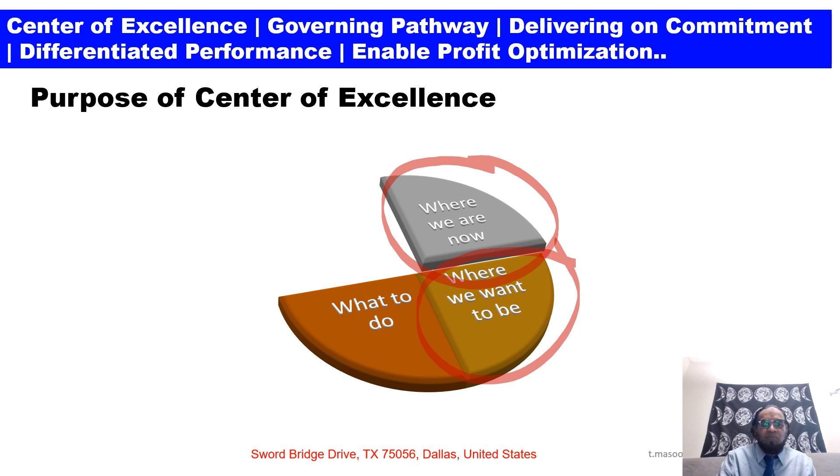Okay, Center of Excellence, lecture number 8, HAZOP study guideline, section number 6. Okay, purpose of Center of Excellence. What do we have to do through the Center of Excellence? First, where we are now. Second, where we want to be. What to do and how to do. These are the 4 segments in order to deliver the results. Okay.

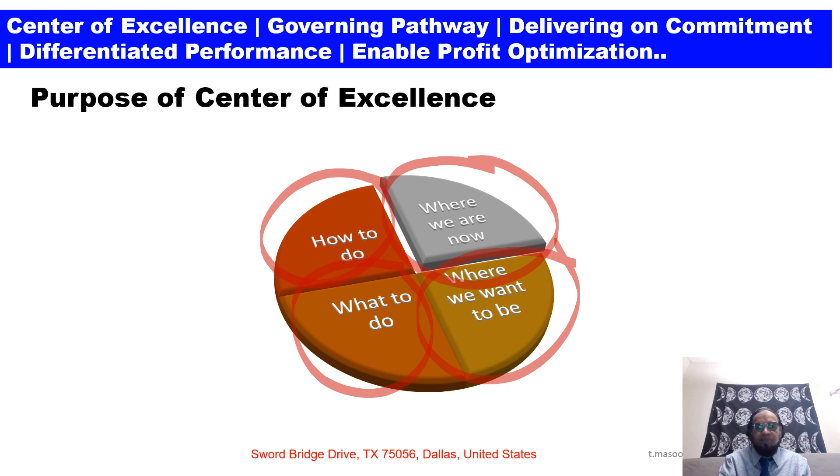Center of Excellence. Governing a pathway, delivering on commitment, differentiated performance, enabling profit optimization process. We have started the hazard and operability management system, that is HAZOP, section number 1. Next lecture, we are going to start hazard identification, then later on quantitative risk management system, risk assessment, and safety integrity level assessment, also known as SIL. So these segments will be discussed at a later stage.

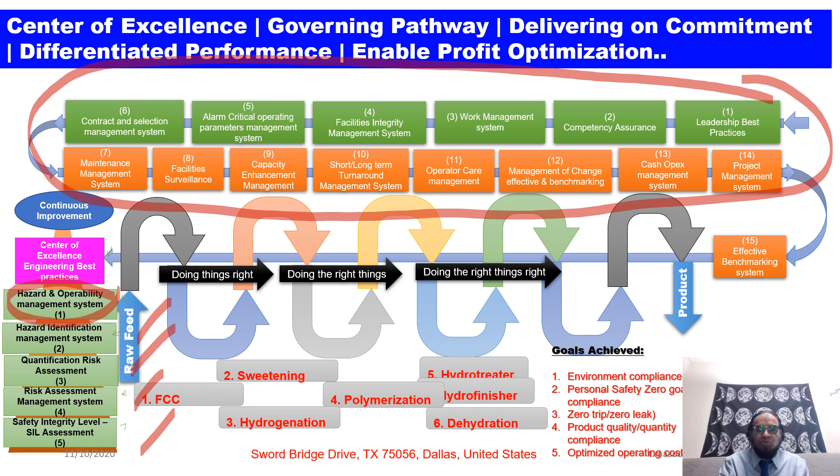Okay, all these segments I have already discussed in my earlier lectures, defined but not in detail. So each segment has a couple of lectures which we are going to deliver over the next couple of years. Probably it could be 200 or 300 lectures. Okay.

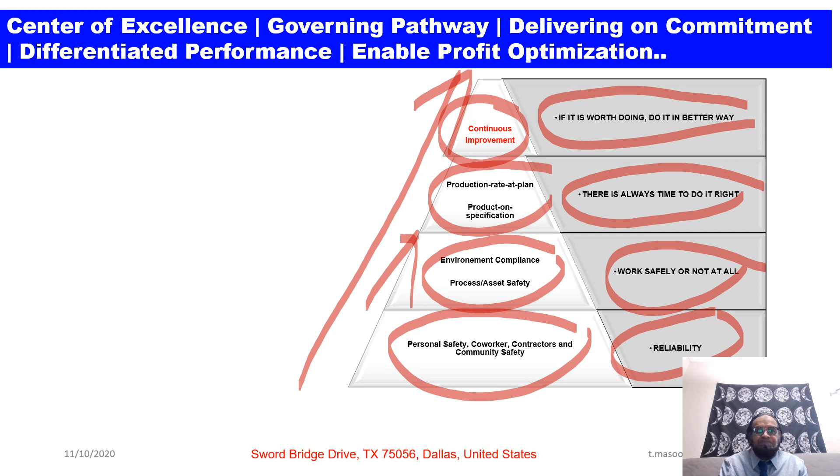That's important. And number 3, production at plan, product on specification. So there is always time to do the right things at the right time. And then continuous improvement, that is my lagging factor. So if it is worth doing, do it a better way. Okay. So what we have to do, everybody should participate.

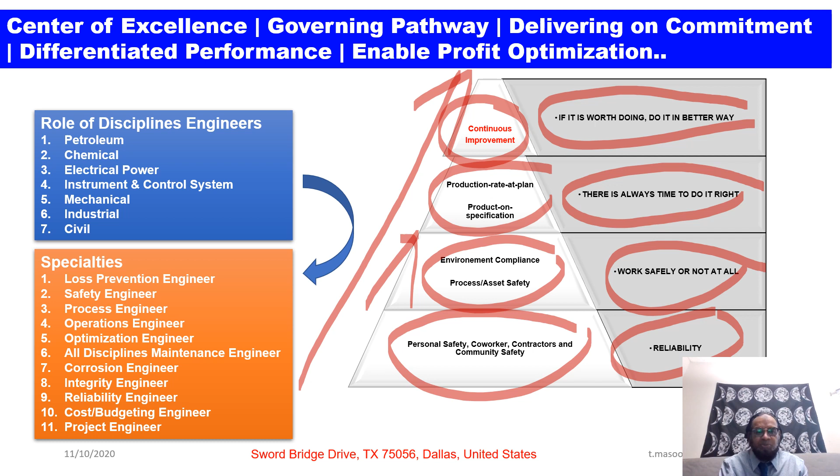The role of different discipline engineers: petroleum, chemical, electrical, instrument, control, mechanical, industrial, civil engineers. These are their specialties. Loss prevention, safety engineers, process, operation engineers, optimization, all discipline engineers, corrosion, integrity, reliability, cost, and project engineers. Okay. These are engineers based on their specialty. They have to deliver first to stop, to mitigate, or to control our leading factors.

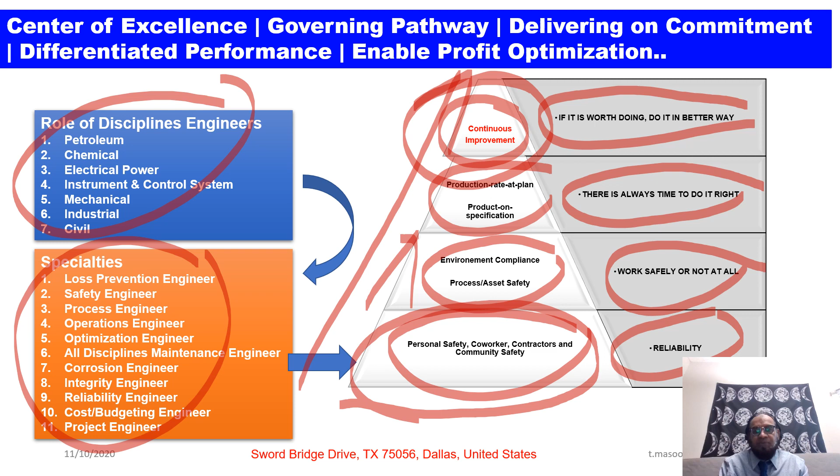So with these leading factors, if there is any leakage from the leading level, it will go to the second level, third, and then you cannot deliver the result over here. Okay. So in order to be specific and to achieve what we want to be, we need a center of excellence for engineering best practices to stay at the top of the pyramid.

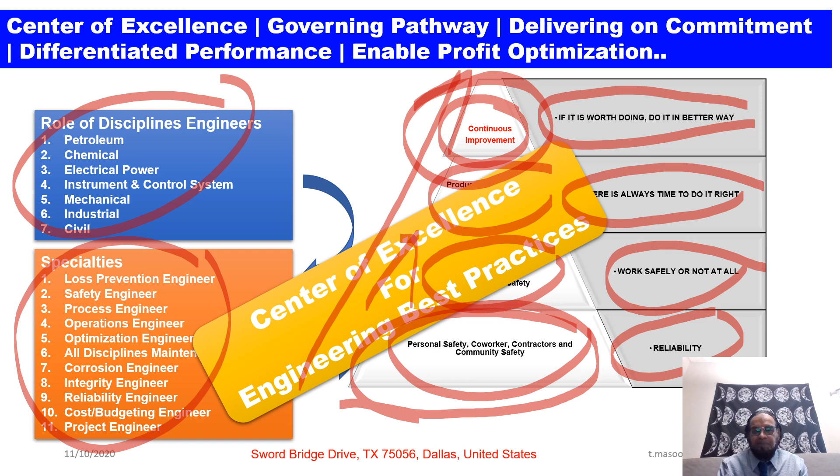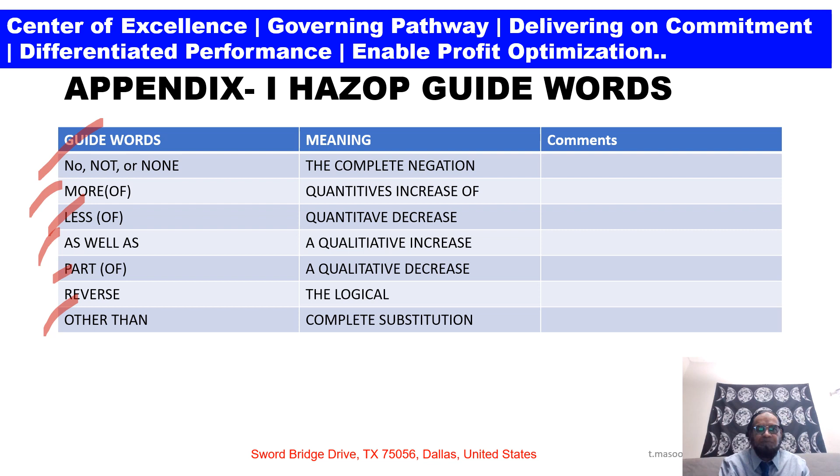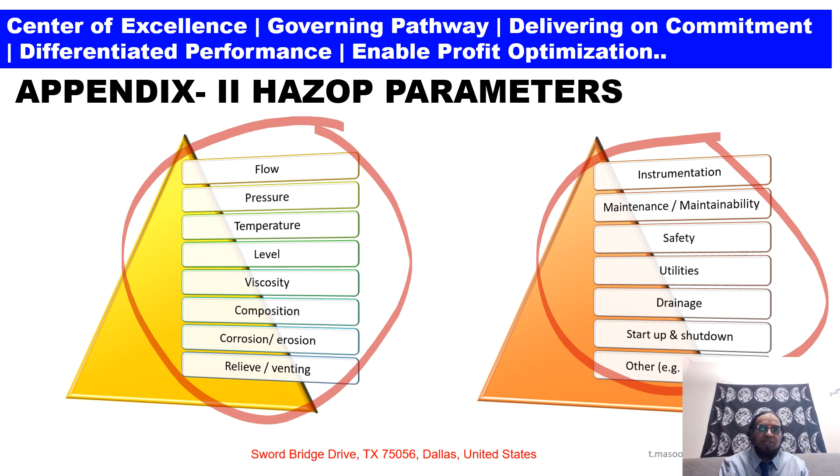Next, appendix 2, HAZOP parameters. HAZOP parameters are constituted in two forms, this is my left hand side and this is my right hand side. Flow, pressure, temperature, level, viscosity, composition, corrosion, erosion, relief, vent, instrumentation, maintenance, maintainability, safety, utility, drainage, startup, shutdown, etc. These parameters must be controlled or mitigated through our mechanisms. That is a key purpose of HAZOP study.

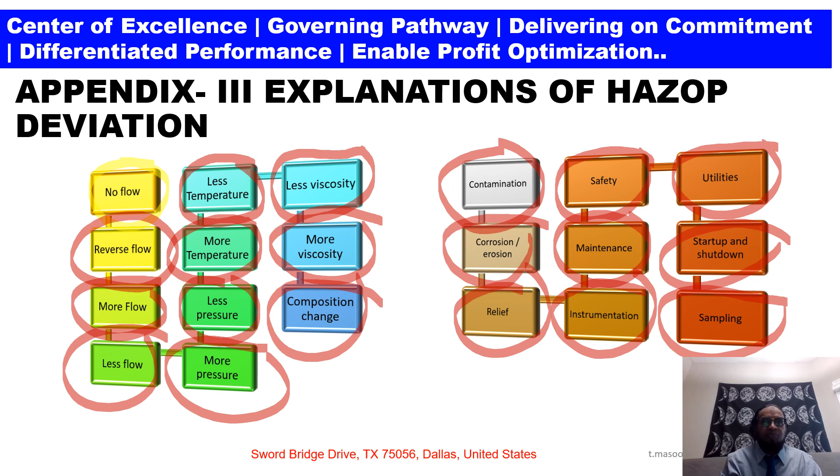The last, but not least, is the sampling procedure and operator safety, time for the analysis result, calibration of automatic samplers, reliability, accuracy of the representative samples, diagnosis of the results, loss of sample flow, etc.

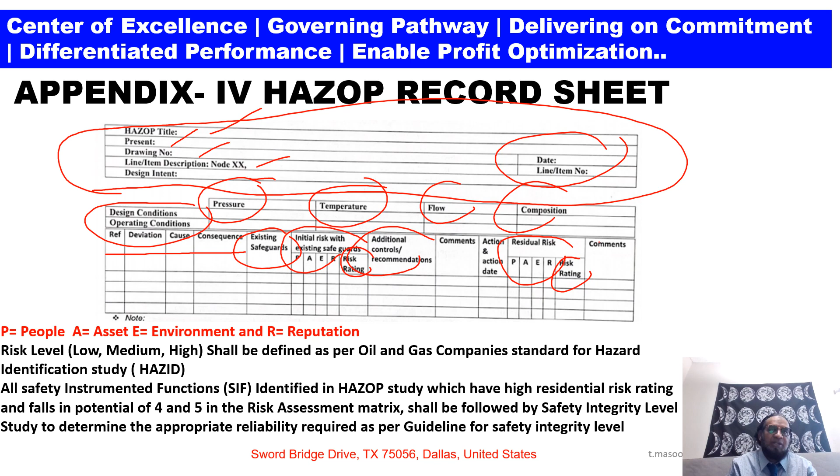And furthermore here they demonstrate the item, cause, consequences, action taken by, and here you can give more detail about the action taken, reply produced by, accepted or rejected, the date and time, and incorporated into design or incorporated in the field, whatever you need to mention over here. So that is the HAZOP action sheet. Based on that you can identify the residual risk and risk rating in order to safeguard the plant operations. Thank you very much for your patience.

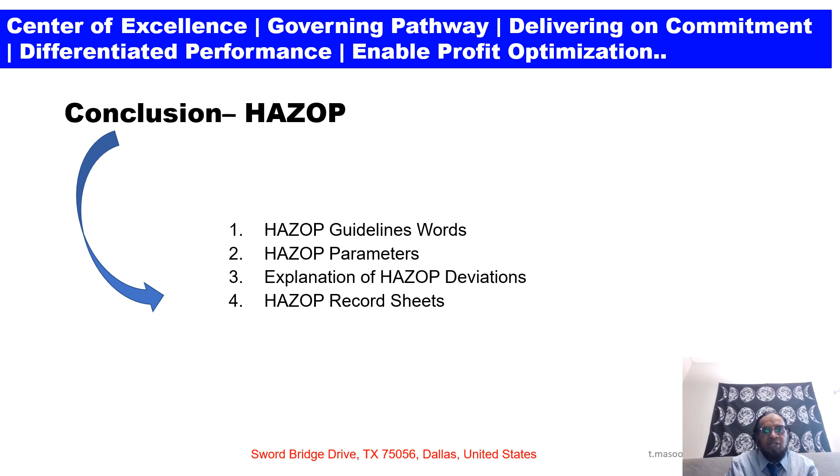What we discussed today: HAZOP guide words, HAZOP parameters, explanation, HAZOP deviation, HAZOP record sheets, HAZOP action sheets. Okay, next we are going to discuss HAZOP. It will take the next couple of weeks.

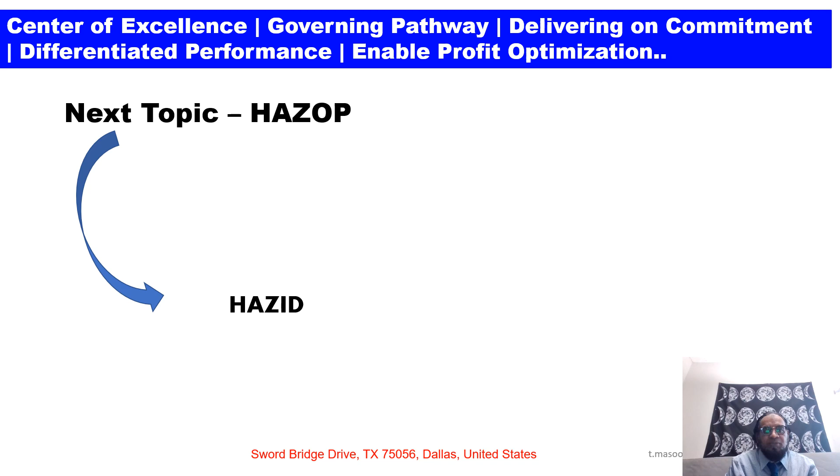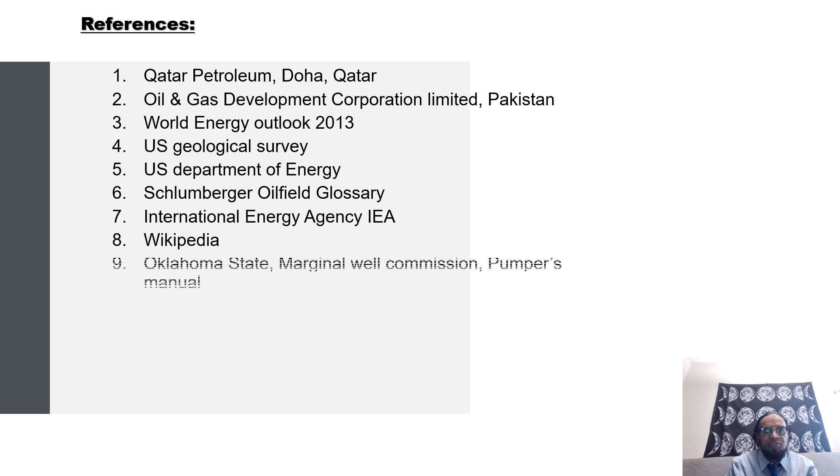So these are a few references: Qatar Petroleum, Doha, Qatar Oil and Gas Development Corporation, World Energy Outlook, U.S. Geological Survey, U.S. Department of Energy, Schlumberger, International Energy, Oklahoma Manual, State Oil Fact Sheets, NORSOK, Study of Oil, Pennsylvania, liquefied gas, and natural gas from wellhead to burner tip.